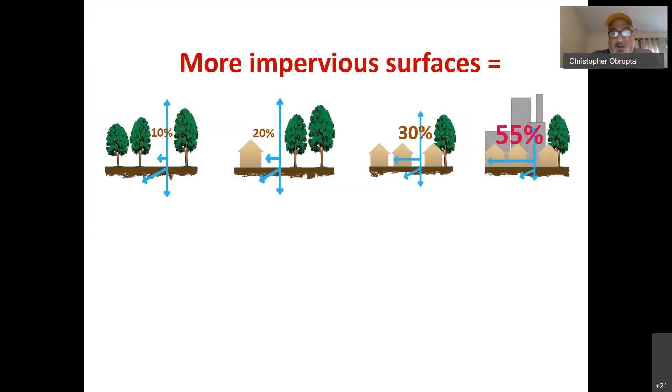Okay, so this is New Jersey. This is the forests of New Jersey, the farms of New Jersey, and you can see the thunderstorms moving in there on top. The corporate centers of New Jersey, right? The townhouses of New Jersey, and the single family homes in New Jersey. So what we're dealing with here is really stormwater management. As it rains, that stormwater runs off the land and carries pollution with it to our waterways and causes flooding. The forested area, the natural area, you get about 10% stormwater runoff.

In New Jersey, we get about 45 inches of rain a year on average. So about 10% of that would run off from a forested area. Most of it will get absorbed. About 20% will run off from a single family home situation where you have 1 to 5 acre lots, so you get a little bit more runoff. You have smaller lots, 1/4 acre to 1/2 acre, you get about 30% runoff. And then downtown, Morristown, and some of the urban areas, we get about 55% runoff. So the idea is how do we make these more impervious surfaces in these more developed areas look more like a forested area.

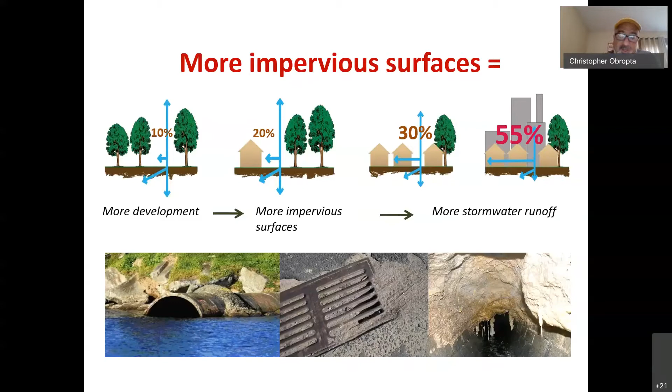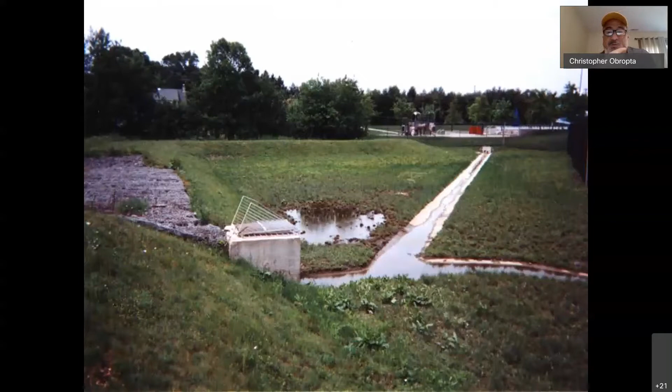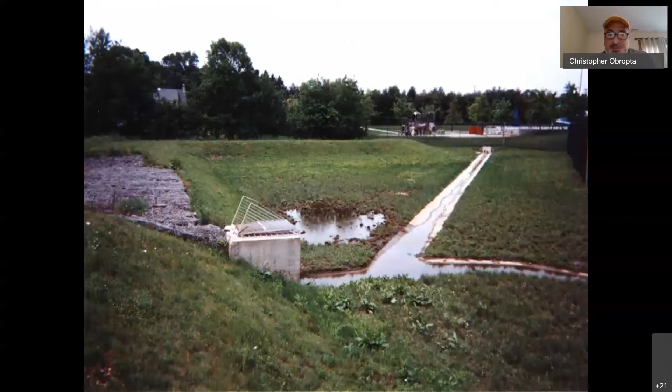So, the first attempt at that in New Jersey was these ugly detention basins. The idea was when it rained, these basins would detain all the stormwater from the development, hold it for a few days, and let it out slowly over time so we don't flood our downstream neighbor. These were very popular in the late 70s up until just recently. We used to build these on a regular basis. You put one big basin at the bottom of the hill, and that managed the rainfall from maybe 40 or 50 houses. So one system to manage lots of area.

And you could see some of them are surrounded by these beautiful natural pine trees. I think that's the Norway maple there, or the Colorado blue spruce. So really not from New Jersey. Very monoculture, with these concrete low flow channels in it. You can see it filled with water because the channel's clogged. But those channels were meant to hurry the smaller storms out and just hold the bigger storms. So these did very little for water quality because the smaller storms pass right through them.

About 90% of the rainfall we get in New Jersey comes in storms that are less than 1.25 inches. So when you design a basin to handle 8 inches of rain and you're only getting 1.25 inches of rain, the basins aren't very effective. So there's a new way to manage stormwater. It's called green infrastructure. The idea is that instead of having one big system at the bottom of the hill, why don't we stagger small systems throughout the entire community, capture the water near its source.

When it comes off your rooftop, we're capturing it in your yard, or if it's on a road in front of your house, we're capturing it off the side of the road. And we manage it where it lands as opposed to letting it travel and carry all the pollution downhill to that big basin at the bottom of the hill.

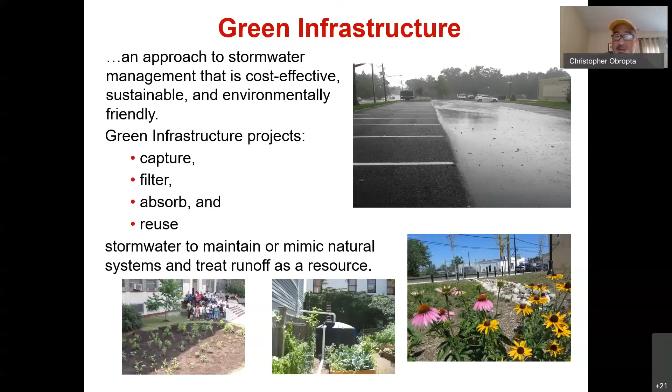So these are systems that are designed to capture, filter, absorb the water, infiltrate it back into the ground, and in some cases reuse water. So that's a big thing that we try to do. So these are some of the green infrastructure practices that we know about and that we use frequently. I'm really just going to talk about the first two, rain gardens and permeable pavements, today.

But you can see the other ones here, the bioswale. Swale is just a nice word for ditch, drainage ditch. And bio means life, so it means a ditch with life. So basically, it's a vegetated swale, a vegetated ditch meant to move water from one location to another. And as the water is moving through the ditch, it's getting filtered, it's getting infiltrated, it's getting treated.

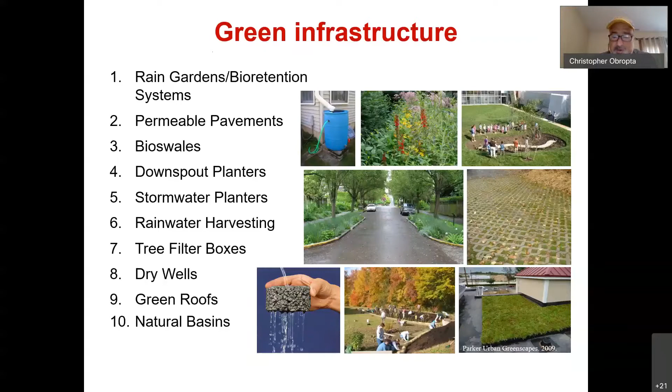Downspout planters, so think of a rain barrel, but instead of just holding the water, it also has plants in it. Stormwater planters are really the thing you can kind of see in that picture in the center along the roadway. So you have these cutouts along the road where you have basically rain gardens built into the side of the road. We often call those stormwater planters. And then rainwater harvesting, most of you probably have a rain barrel. Some bigger systems we've used in the past, these bigger cisterns, capture much more water and do a much better job of managing rainwater. So that's important.

Okay, so we have rain gardens. Another name for rain gardens is bioretention systems. The problem with the bioretention system terminology is that nobody knows what it is. It sounds a little scary. So we quickly converted it to rain gardens and started talking about it as rain gardens. It sounds much nicer. The idea is it's a shallow landscape depression.

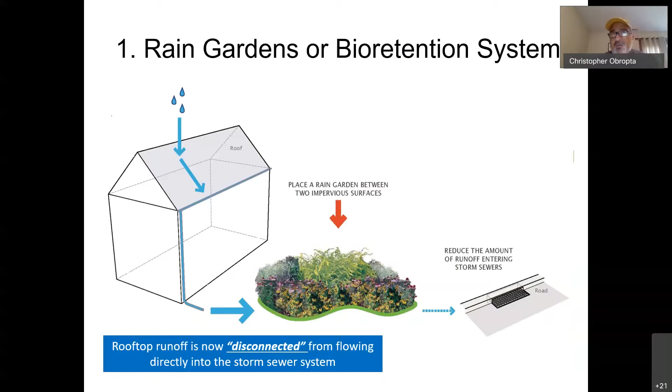The plants are providing some habitat for pollinators and other species. There's a mulch layer in there where there's some microbial activity that also kind of decomposes some of the pollutants. So it becomes a very effective system. And if it's built right, it looks just like a part of your landscape.

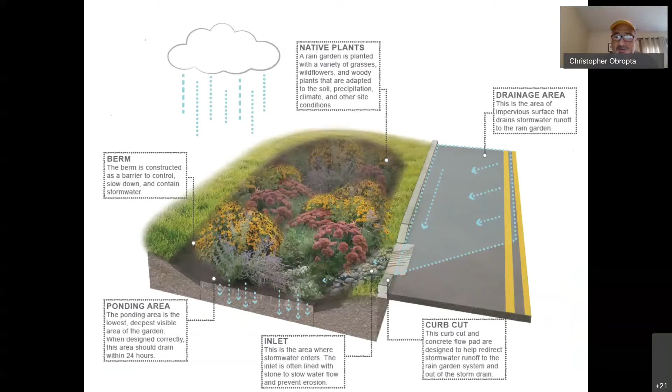So you can see here's a schematic of one catching rainwater from the roadway, going into the garden. The gardens are very flat, so it's very much like a bathtub. So it fills up uniformly. And then once it gets to about 6 or 8 inches deep, that water slowly percolates into the ground. And then it's gone quickly after the storm and into the ground, recharging your groundwater table.

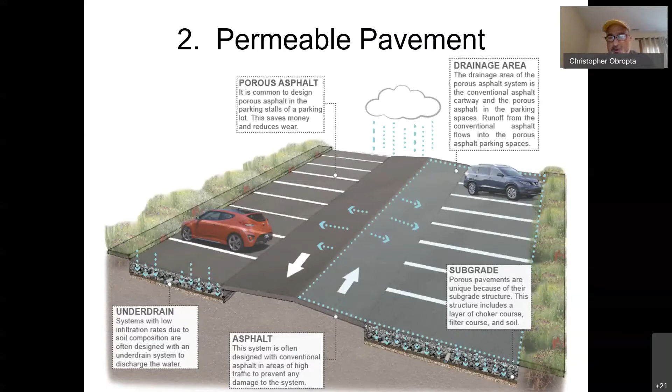The second system that we use a lot of in New Jersey are permeable pavements. So we think of this as a porous asphalt system, this one here, where all the parking spots have a porous asphalt. So it's a very coarse material. Water passes right through the asphalt, goes into the stone layer underneath it, and slowly percolates into the ground. So you can see there's different types of this stuff.

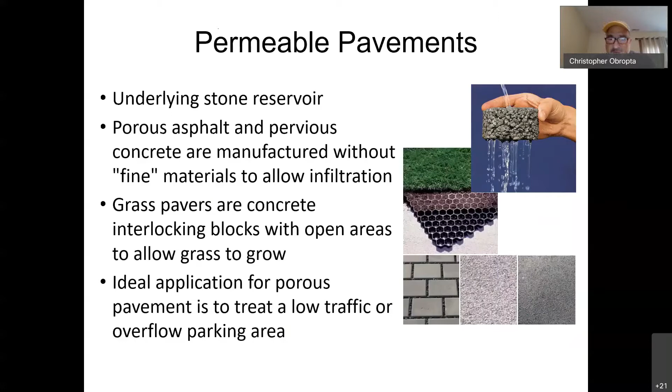Here's a schematic of what it would look like. You have the asphalt on top or the concrete on top. Water goes right through that surface into that stone layer. The stone stores the water until it can slowly seep back into the ground. As the water is moving through the stone, it gets cleaner and cleaner because it's like a filter.

You think about your Brita filter on your faucet. Well, as water is passing through the filter, the pollutants are getting attached to the particles in the filter, and then clean water comes out of the bottom. This is the same type of system.

What's nice about this is because the water infiltrates very quickly, you don't have to use as much salt on it in the winter when it ices over, and it will rarely ice over because there won't be any black ice, because water doesn't sit on the surface to freeze. As soon as the water hits the surface, it goes through the asphalt into the stone layer underneath and becomes a really, really nice system.

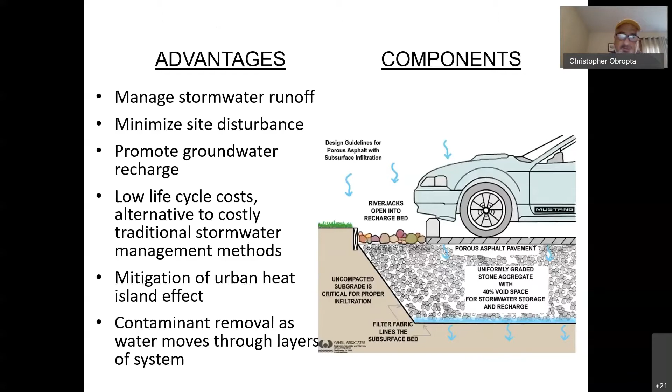You'll notice in the system there are no catch basins. We don't need to put any inlets here because the entire asphalt surface infiltrates. So we don't need any piping, any inlets. The water can just infiltrate into the stone underneath and then into the ground.

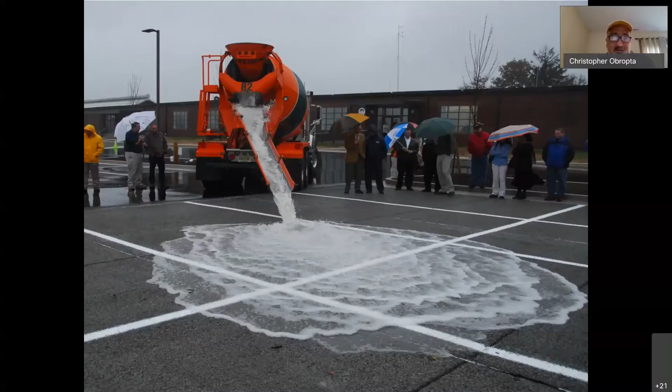This is EPA in Edison. There's an Environmental Protection Agency Center in Edison, New Jersey. It's the Office of Research and Development. They do have porous asphalt, pervious concrete, permeable pavers here. And the idea is that they do testing on this.

What you're supposed to do with this material is you're supposed to vacuum it twice a year as a way to clean it. What they did in Edison is they didn't do any maintenance on it at all. And after 8 or 10 years, it's still infiltrating at the rate it was originally at. And this is the parking lot they park on every day. It's not out of the way, so it really gets a lot of use. So unless you have a lot of soil or dirt washing on it, or you use a lot of grit when you're salting the roads, the chances of clogging are very slim.

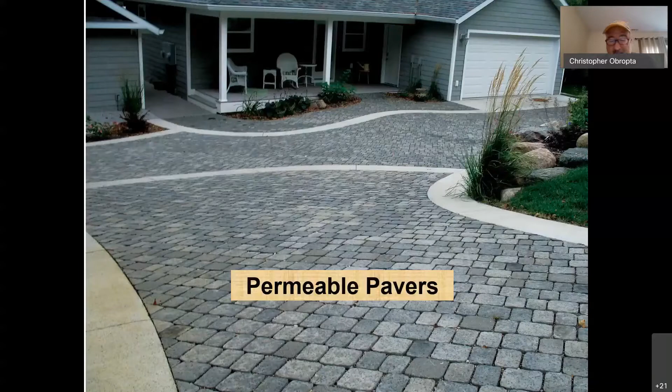This extent of it here in this picture, there's a lot of it here. This is a pretty expensive project, okay?

So my kids, when they were young, used to play soccer, and I'd drive to these soccer fields, and all these parking lots would be paved. I'm like, why are you paving these? Why aren't these grass pavers? It's much better for the environment, you know?

So we talk a lot about stormwater management in New Jersey, and most people immediately say that, well, the developers need to do more. Well, 90% of our waterways aren't meeting water quality standards. All of New Jersey floods when we get 1 to 2 inches of rain. So even if the developers create no additional stormwater runoff, we still have those problems, right? And we do have some pretty good stormwater regulations now that prevent developers from not doing the right thing. So the bigger thing is we need to go back into existing development and retrofit it with stormwater management, okay?

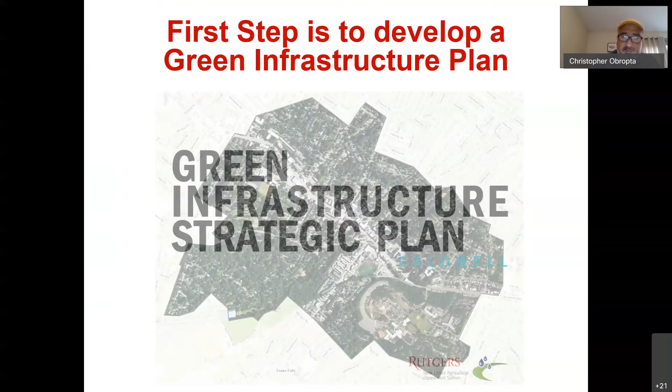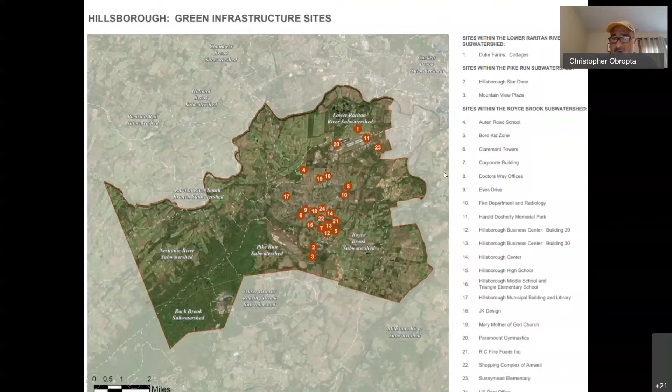So to do that, we often need a plan. So Rutgers has been developing green infrastructure plans for a while. This is one that we did for Hillsborough. And you'll notice here, there's about 24 sites that we identified where we could quickly implement green infrastructure. A lot of the sites are churches and schools and park areas. So very public, highly visible places where people can see it. You notice most of the sites are in the center of town where most of the development is, right? And it's the older part of development where there's lack of stormwater management.

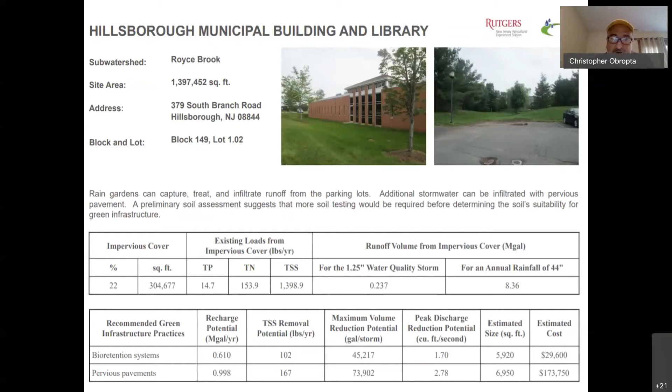So for each site, there's a site, the municipal building here. It's not just a municipal building, it's a whole complex. It's a library, police station, senior center, it's all in this one complex. So you can see this is one of the sites we chose. We just have some information on the site in these tables, and then we actually show you where we could put different practices. So this is an aerial photograph of the building here.

And you can see we want to put a rain garden over here to take this parking lot runoff. So all the green spots are rain gardens. All the blue spots are the drainage areas to those rain gardens. So you can see how much of the area we're going to be able to manage with rain gardens. And then the orange rectangles are porous asphalt. So this whole parking lot can be managed with a small strip of porous asphalt here. This section of parking lot can be managed with a couple small pieces of porous asphalt.

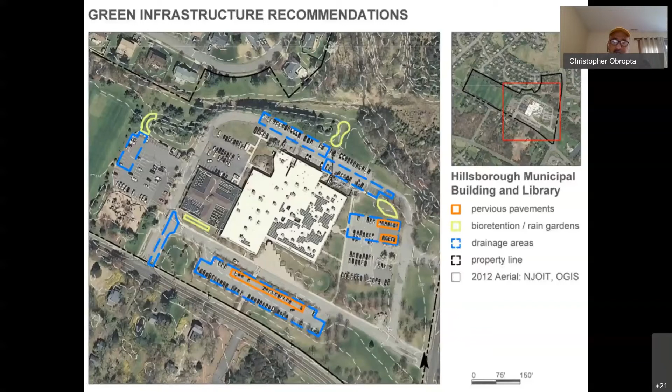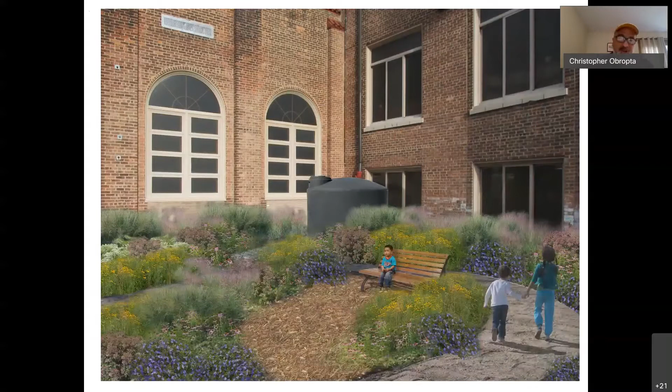So this is kind of the master plan we had done for Hillsborough and identified several projects. There's 4 rain gardens here, maybe 2 sections of pervious pavement. That's not all the potential projects at this site, but those are the ones that we identified pretty quickly and included in the plan. We often show sites like this where we'll show the before picture and then we'll Photoshop an after picture so people can get a feeling of what it would look like, right? So once again, a before picture and then an after picture, trying to figure out how to convert an area into a green infrastructure area.

This is interesting because what we had done here is we built the rain garden, and I don't know if you can see my mouse here, but we built it in this lower area down here in front of the building. But then we decided that maybe we can turn this into a master plan for the whole building. So we've got pathways going around, connecting different gardens. We've got porous asphalt areas still called out, pollinator gardens.

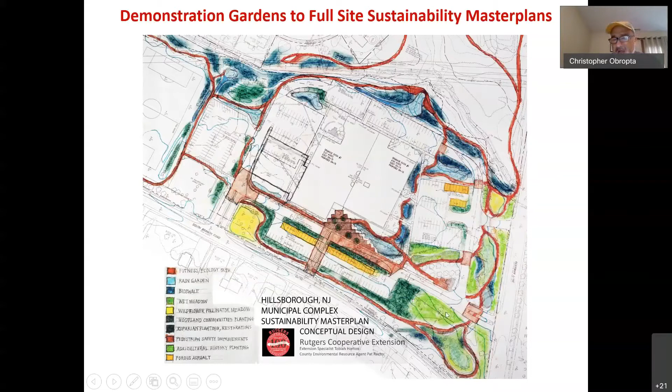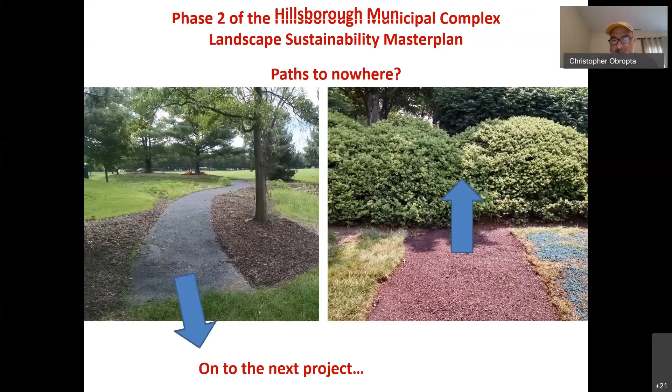So the whole idea is that you take these one little project at the municipal building or at the school, turn it into a master plan for the entire school or the entire municipal complex, the entire neighborhood. We actually used the rain garden at the municipal building as a demonstration garden, and then we offered a rain garden rebate program.

So people would come in, they'd spend about an hour learning about rain gardens, and then they would sign up for a half-hour time block, and we would design a rain garden specifically for their home with them. At the end of that half hour, they would go home with a plan, they would build it, and then we would give them a gift card for up to $450, depending how big the rain garden was. So we did that in Hillsborough. We must have had about 12 rain gardens built over the course of a few months. It turned out to be a really, really nice program.

So that's all I have for you today. I was going to give you much more, but I thought you might want to talk a little bit about this while I'm here.